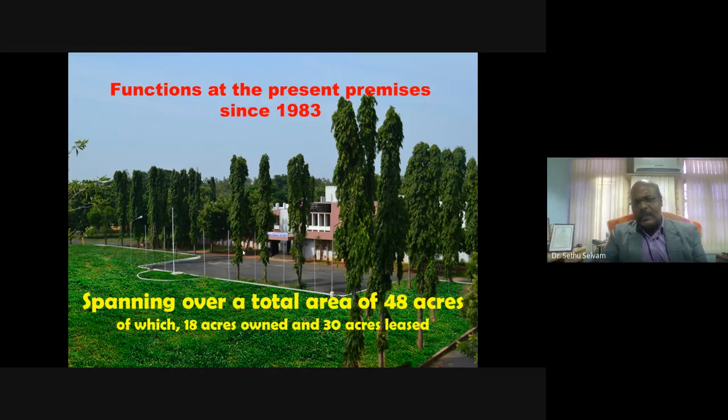Established in 1965—probably I was also not born at that time. These are the functions. We have 48 acres of campus, more bigger than any engineering college coming up nowadays. That is the vast basic infrastructure.

This is our main institute, where I am sitting on the first floor delivering the lecture. This is our main academic building, where most of the classes are conducted, with a well-defined infrastructure—LCD projectors, air-conditioned classrooms, and other state-of-the-art training tools. We also have a conference hall, air-conditioned auditorium of 140-seater capacity.

It's almost like a cinema theater, and we have renovated it recently. We have our own computer laboratory with internet and other features, and a very good library with more than 7,000 books. Our area of collection is mostly in thermal power plants—any old power plant machine diagram or line diagram, we have it. We also have faculty rooms, administration, and accounts.

Then this is the workshop. It's not only teaching—we take you to the workshop where maintenance and other concepts are shown, including a cutaway look of a pump.

So a person can see all these things. The workshop building also has a tutorial classroom for the purpose, and classes can be conducted there. We have certain basic facilities there also. This is just a gist of our workshop.

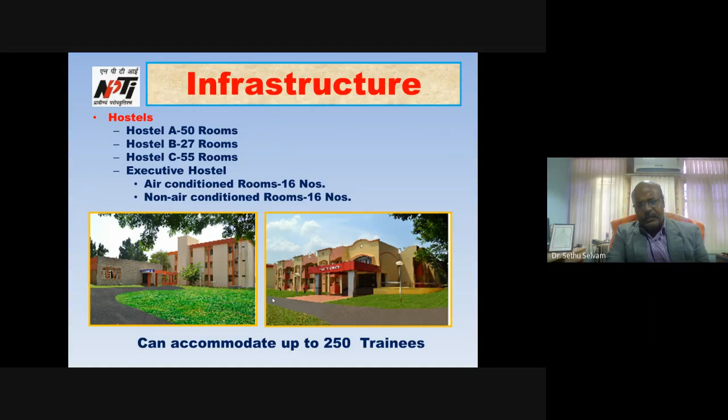We also have a hostel. We have 3 hostels, hostel A, B, C, and there is an executive hostel as a new facility. It can accommodate a maximum of 250 trainees. And this is our guest house, which has 4 air-conditioned suites.

Now, regarding the methodology of teaching, we have our own multimedia training package, because nowadays everybody wants computer teaching as supplementary. We have made our own packages, about 60 packages, and each package can run for more than 2 to 2.5 hours. So this way, the students are given this as supplementary material.

Because if I explain so many things regarding the generator, boiler diagrams, and inner details, it is not possible to bring out everything on a slide. So we have this, and we are also selling these packages commercially.

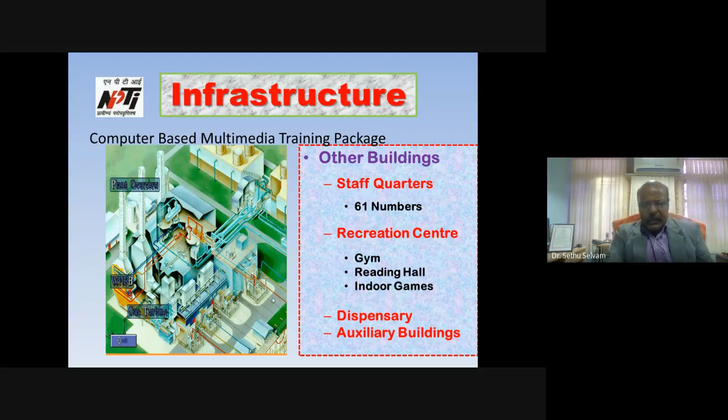Other buildings are there too. We have our own complex with 61 quarters. There is a gym, reading hall, all these things are there.

Coming to the academic point of view, we are running 3 regular courses: a 1 year postgraduate diploma in power plant engineering, then a graduate engineering course with a capacity of 77, and PDC, post diploma course, which you can do after a diploma.

Other short-term courses are also available. Now coming to the point of placement, I have produced a partial list. These are the power leaders as far as India is concerned.

TPCAL, TCE, GE India. Why I am mentioning this is because you want a career opportunity, so you should know the scope and who is in this teaching, in this pioneering experienced field, and what the scopes are.

Exactly these companies are there: Adani Power, Shapoorji Pallonji, OPG, ILFS, Bajaj Energy, Lanco, Torrent, Tata Power.

And the advantage is, once you join here, we have our own reputation, and because of that name, people come every year for campus placements. And there is a 3000 megawatt thermal power plant located in Neyveli, so they are our big brother.

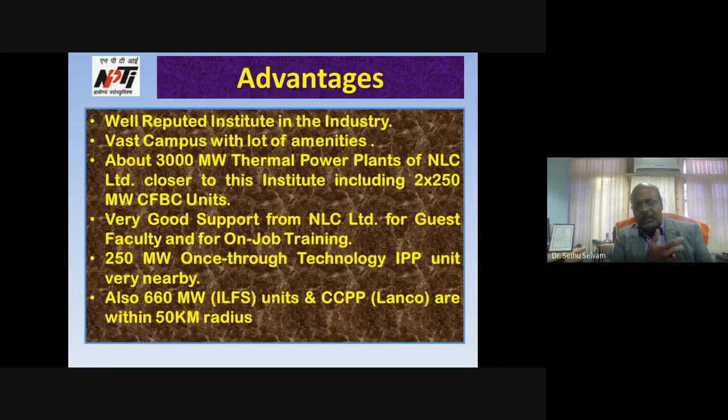We share their facilities for giving on-site training. And not only that, we take some expert faculty from them, because everything cannot be taught by us; everybody is not expert in everything.

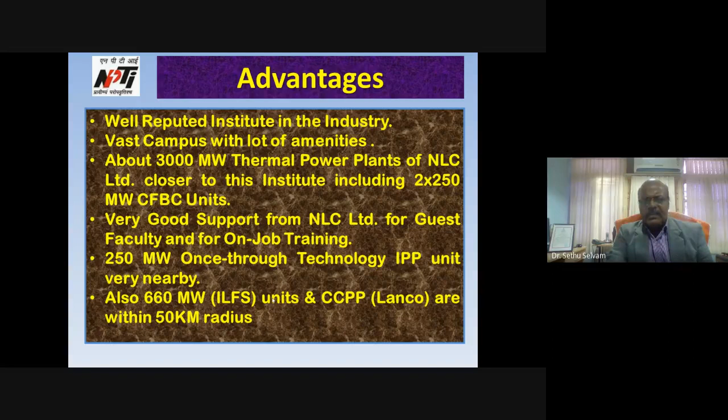So we also have an IPP, 250 megawatt once-through technology IPP nearby, also a 660 megawatt ILFS CCPP, and all are located nearby. Now, you may ask what is in that thermal power plant.

So let me show you this. Yes, this is on. I'll take you to this. Where is it? Coal to electricity - you should know this.

Can you see this slide? Can you see this? Yes, we can see it, sir. Coal to electricity. Yeah, this is what? Just a tool showing what the thermal power plant is.

Sir, the slide is not visible, sir. Oh sorry, this is not visible, I'll fix this. One minute, sir. Stop, sorry. And just... present now, a window, where is it?

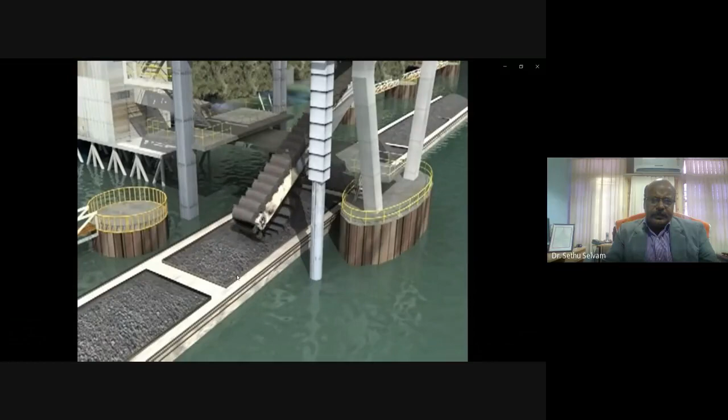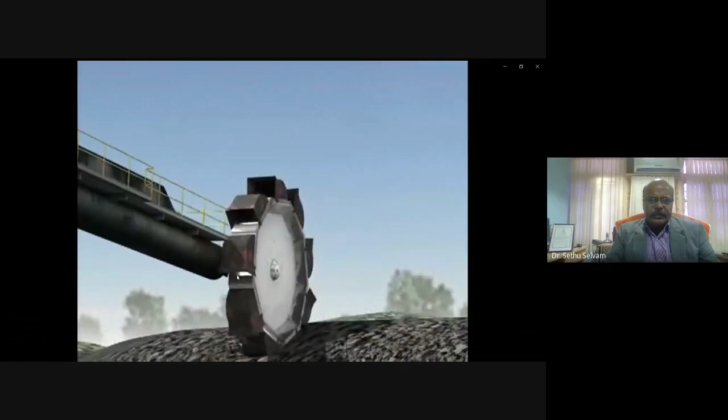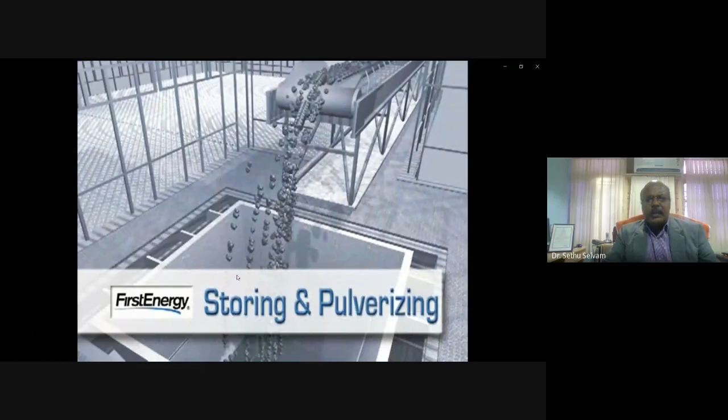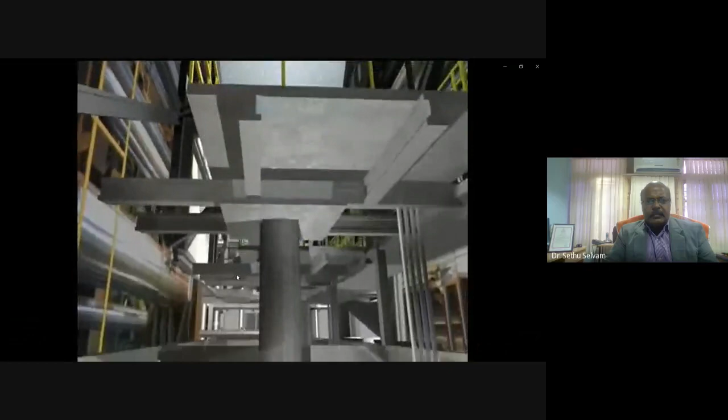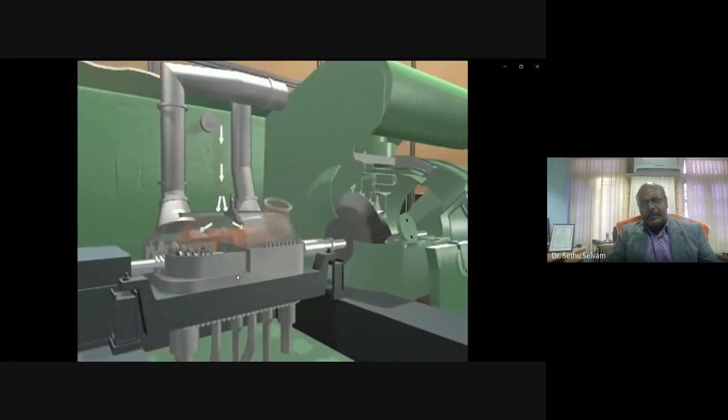This is the conversion of mechanical energy to electrical energy.

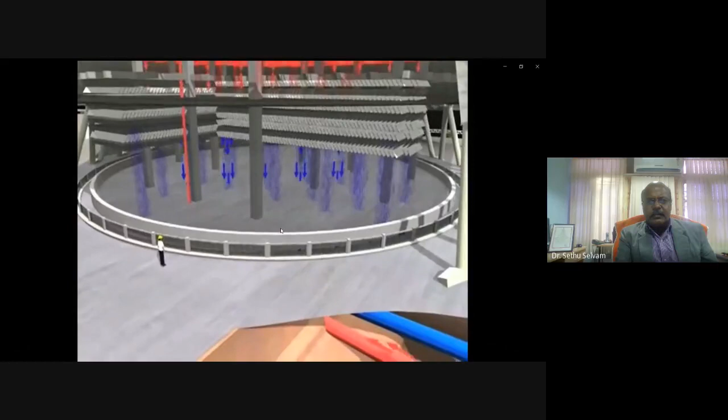Scrubbers, they remove fly ash.

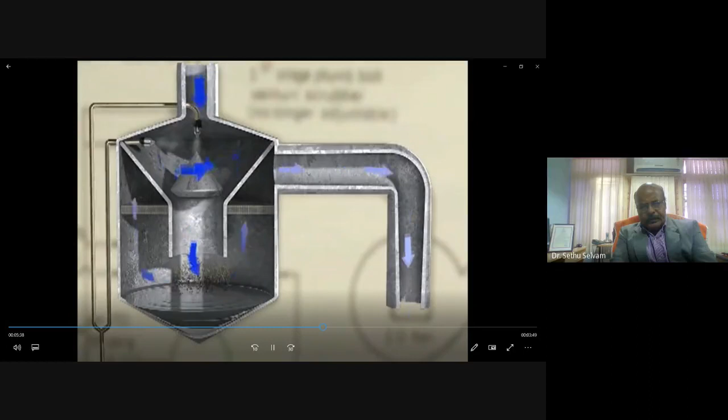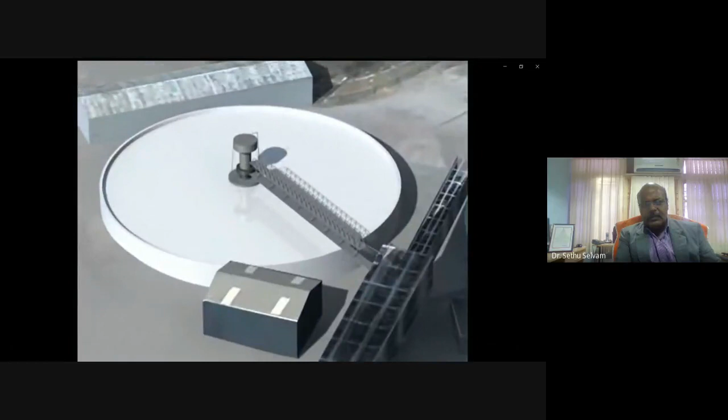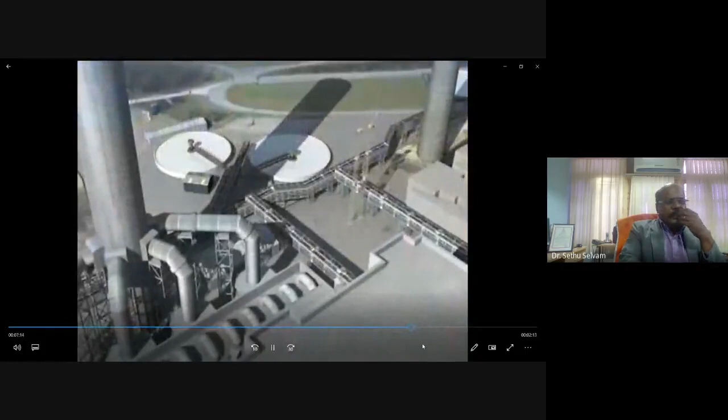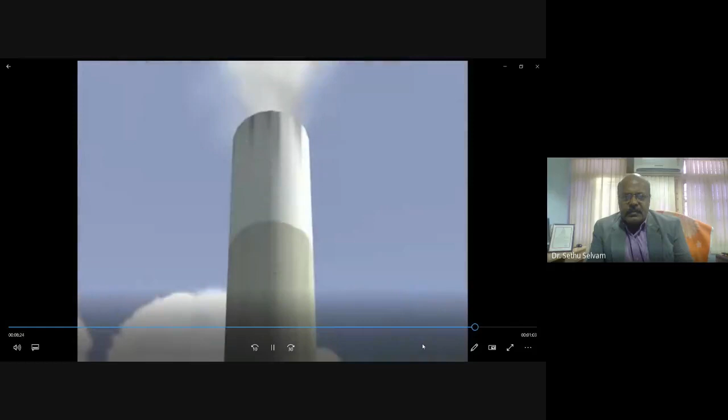This part probably... so up to this is the part. Now let me take you to the actual presentation. Is it okay? Is it shared? One second, one second, then I have to start here. This, you have seen the show now? Is it okay, Mr. Regan? Can you see this? No, sir, it's not visible to us. It's not visible to us, sir. Okay, one second, one second, I'm not conversant with Google Meet anyway.

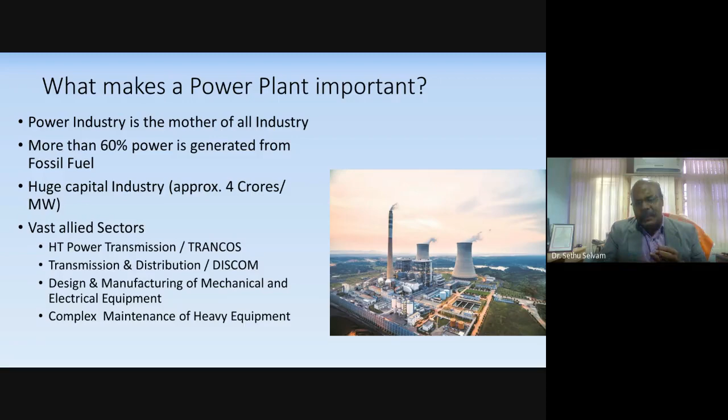Ultimately you are paid for the power plant from the user only. The user is using certain electricity, he has to pay, and other maintenance aspects are there. Everywhere there are scopes, from design, implementation, running, maintenance, and all. So the power plant has its pinnacle in all fields.

So what makes a power plant important? We are continuing. Huge growth opportunities to grow from a graduate engineering trainee to CMD, GM, President of Power Corporation. This is good, with very good remuneration. You all know the entry cadre salary of a GET in NLC is 7 lakhs. And if you become a GM, how many times is it multiplied? Maybe by about 5 to 7 times.

Not only that, you are working in a challenging industry, managing so much manpower, 1,000 people are working in that. So if you have a passion to work in a power plant, you can choose this career. Not only that, like the IT industry, here also we have a switchover opportunity - if you want to change to the next organization, well and good, you can change immediately because there is plenty of opportunity to switch over from one organization to another.

Great technical challenges in the job and opportunity to cross continents, because if you are working in a power plant, you're not only working with national traders and national manufacturers, you will be meeting international manufacturers, international bidding. So in this opportunity you travel to different countries, and different possibilities are there, with a wider technical platform to share your experience and attend technical conferences.

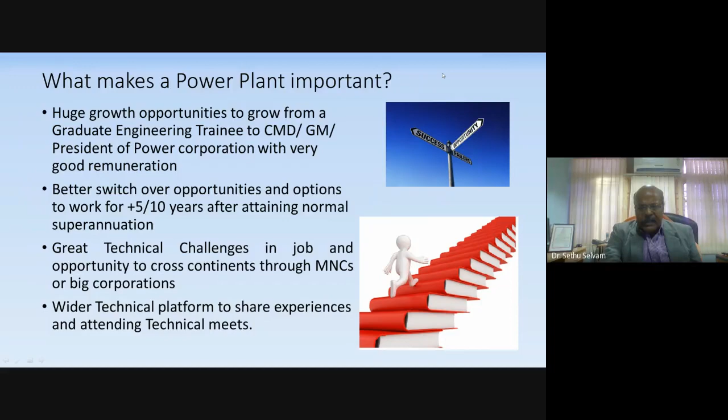A power engineer is a different person. He's not a specialist in electrical, motor, or something only. He knows everything - the mechanical concept also. Suppose it is a reverse cycle compressor, he knows that too. Not only that, he knows the maintenance of a mill and basic problems in the mill. So he becomes a composite engineer, having all the qualities of mechanical, electrical, electronics, instrumentation, and computer applications, because nowadays instruments come interfaced with Ethernet bus, Profibus, system bus - all these things make him a composite engineer.

He can be placed anywhere. Even if you switch over from power plant industry to steel industry or some other industry, you can work, because you are working on a process. Your safety norms or basic knowledge of instruments are there, so you can be employed anywhere. At last, he's a composite engineer with all these qualities.

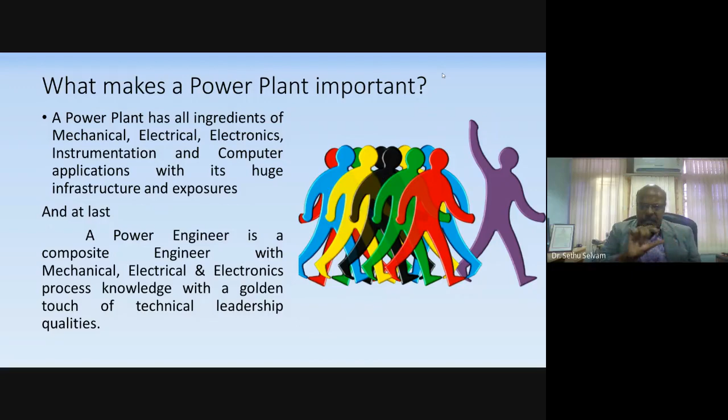Not only that, he is leading groups of engineers - hundreds, thousands of engineers. By that way he becomes a very experienced technical person. So he can give his services even after retirement. We have seen so many persons who retired at the top level still continuing up to 70 years of age, so your earning period is also increased.

So now, you have a mind to work here, and you know all the basics. Can I go immediately and get a job in a power plant? I am a graduate engineer with all good records - can I join? No, there is a restriction.

With a view to build adequate technical capacity and develop economically viable energy sector and energy efficiency, and comply with the laudable objectives of the Government of India, adequate scientific and technical manpower at all levels is a prerequisite. So you should have certain knowledge - who is going to give this knowledge?

There are certain institutes recognized by Central Electricity Authority. CEA is the authority interfacing with the power plants, and they have to certify institutes, like AICTE does. You may be good in knowledge, but you have to graduate from an AICTE recognized institute. Central Electricity Authority inspects institutes and classifies them on this basis. Being a pioneer in power plant training, we are also accredited with CEA, the Central Electricity Authority.

There is an amendment, the IEA amendment law, that says any person working in a power plant of capacity above 1000 megawatts must be trained for a minimum 52-week period from a CEA recognized institute. You should know just by looking at a pipe what it is - whether it is high pressure steam or low pressure steam - and what its essentiality is. Suppose there is a valve and you have a tendency to open it - if you open it, what will happen? Some accidents will happen. You should know all these things.

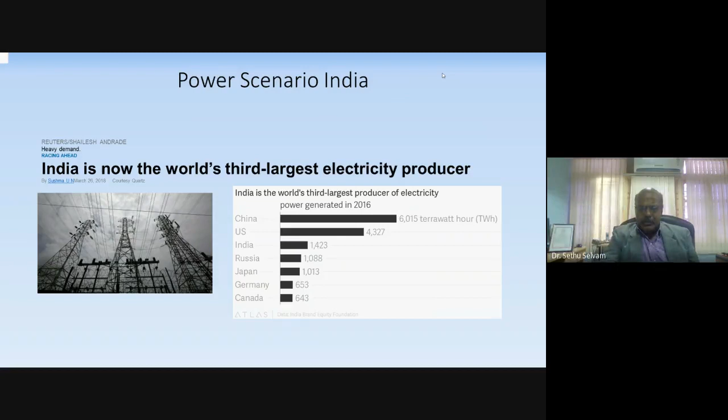You all already know it is power. This industry is the mother of all industries. India is the world's third largest producer and consumer of electricity - we produce this much electricity that we are behind only China and the US. But if you see other countries as a whole, our power generation is huge, very huge, and that makes it a business.

We are producing, and how does it relate to the business? Once upon a time, after independence, electricity was used only for light, and if you had a fan, you were a rich person - that was the ideology. Now the concept is changing - almost all middle income earning people have air conditioners, not just in one room, but in the common hall, the guest hall, all these things. So the demand for electricity is increasing.

If you are earning more, your electricity bill will also be more. So it is a measure of lavish use of equipment, lighting, and the economy as a whole. Nowadays we have so many mechanisms, and we are depending on machines.

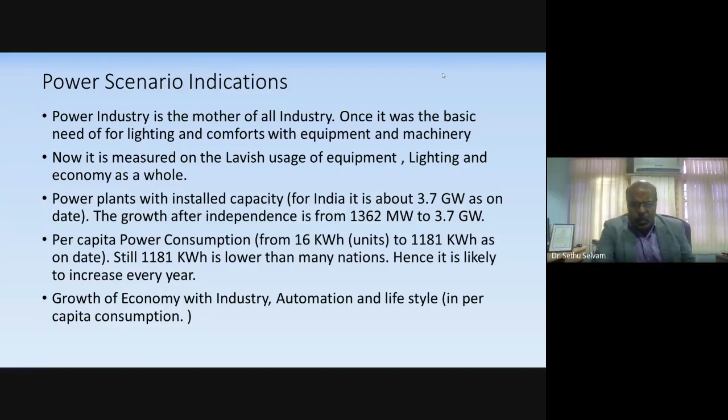I intend to show you the graph from the Central Electricity Authority site. This was shown as of 31st March 2019. You can see the huge jump.

From 1362 megawatt, to 3.56 as on 31st March 2019. Now it is more, the recent reports have not come, but it is anyway 3.7.

So every year there is a marginal increase, we can say 5 to 10% increase. A huge amount, this is a huge amount.

If you see, for example, just take these two, it is more than 10,000 megawatt. That means at least about 15 power stations had been commissioned in 19. So every year 15 to 20 new power stations come.

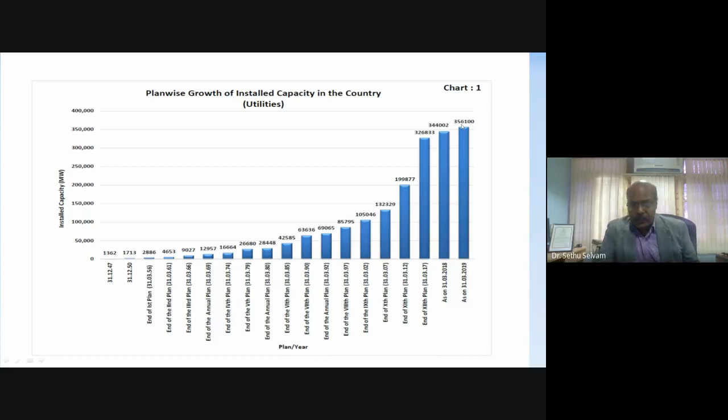And these require manpower from the very scratch level to the top level. So as a whole, we have a very huge demand of manpower. This is the per capita power consumption.

You can see it is increasing. From 2018 to 19, there was a marginal increment. There are so many reasons for this, because India started intensively using LED bulbs, low power consuming bulbs, as a result of which the marginal increment decreased. Now that point is saturated.

Again, we are likely to have at least 50 kilowatt hour further, 50 units further, as a result of which the demand is going to increase. How will you know the demand is increasing? Because the state electricity corporation is not able to give the power to the people.

So in earlier days, load shedding was regular. Nowadays it is managed well, and we are at least able to meet the requirement. When I was a child, every week there used to be one day blackout.

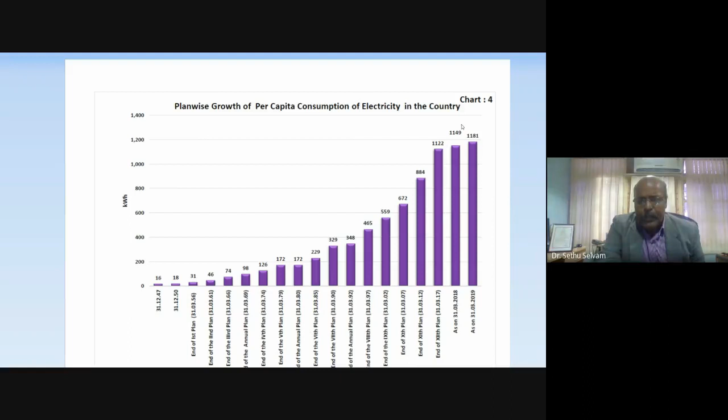This was what happened those days, that was the 90s and 80s. So now this is improving thanks to other features also.

If you see, our power requirement has to increase at least 10 times, that's the idea. So it has to increase at least 10 times, but at least it will be 5 times.

Now, plan-wise growth of installed capacity. Every 5 years India plans, and you can see there was a huge jump in 2012 to 17, where private participants used to come. Earlier, the business was only government, meaning state government, central government, and other corporations. Now private participants have come as a result.

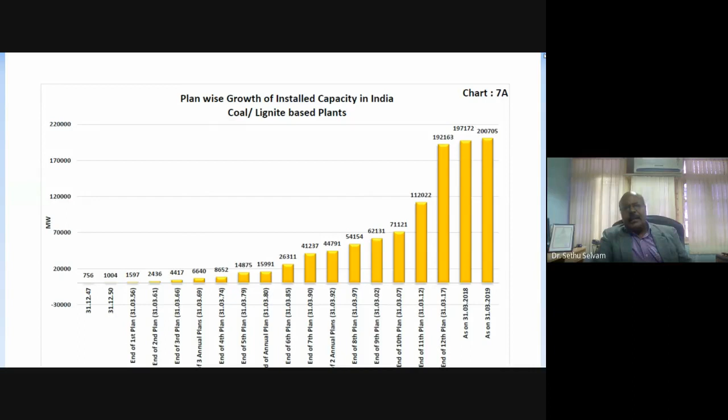Instantaneously, so many power plants are coming, adding to the total generation. So this is a very good business, but the problem in '18-'19, due to solar and renewable energy and other things, we have struck up somewhere else.

Now this concept you should see - you may ask, green power is available, what is the necessity of this? Different types of power sources are renewable and non-renewable. Renewable is that which either never runs out, like wind and solar energy. You are from Tuticorin, you have seen windmills, so many windmills, and in Kayathar there is one solar power plant also. These are green energy. The advantage is that their emission is less - no carbon dioxide, no sulfur dioxide, no other nitrogen oxide.

But can you depend on them totally? It's all seasonal - during the peak monsoon, peaking of wind power is there. Similarly, solar is having certain variation, during daytime from probably 9 a.m. to 3 p.m. there is there. So even then we are mixing it, and the issue is everywhere you cannot have wind power. Similarly, solar power requires huge land - you cannot put it in an agricultural basin, as it will again deplete the business of agriculture.

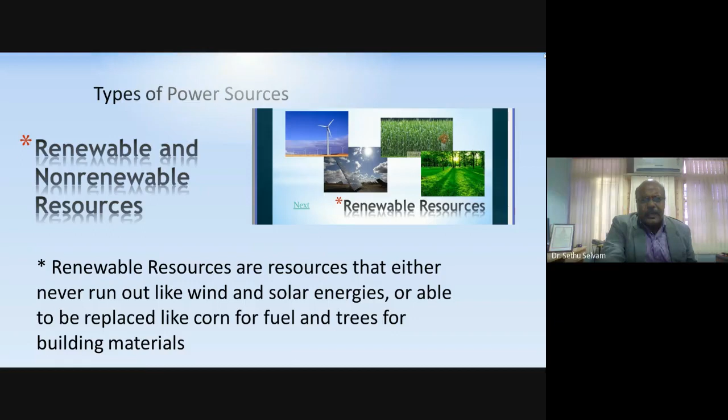Renewable sources, others are also there - animals, water, and earth heat. All these are renewable. Wind, heat - but they must be harnessed and transformed to a useful form like current. Resources such as plants and animals can be replaced by offspring. For example, if deforestation is done, you have to wait for another 20 years until new saplings are planted and a forest is made. So the time duration you have to see.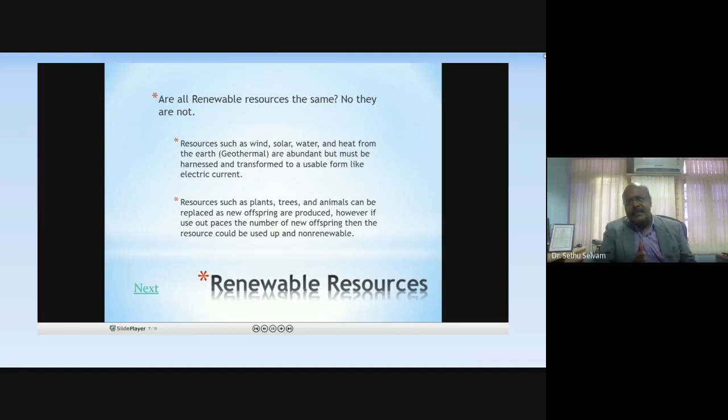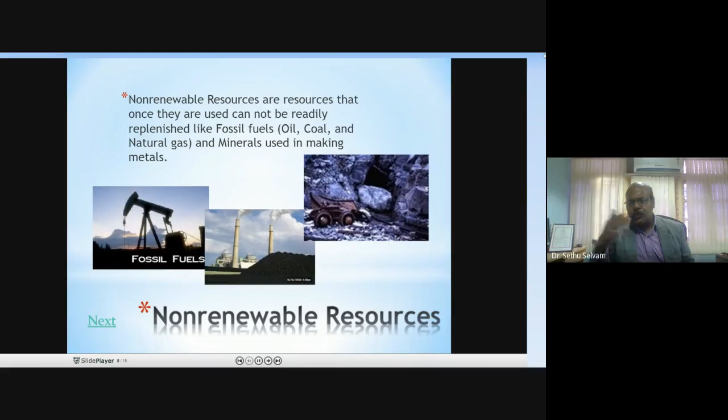Similarly, coal - you call it a non-renewable source, but where does coal come from? It comes from dead trees and animals and other things, all sedimented in rock, and due to thermal process of compression and heat, they are made into coal. This also has a certain - because it might have been done some 2000 years ago, and we are using it again. It can be created, but you have to wait 2000 years. That period of replenishing is more.

Are non-renewable resources gone forever when used up? No, it will take millions of years for things like oil, coal, natural gas to be made by natural processes. If they are used up by one generation of humans, it will be 1000 generations before they are available again - maybe after 3, 4 generations, people won't know what coal is. So we have to reserve certain things, and we have plenty of other renewable energy also that is to be used.

And there is a finite number of times these resources can be recycled. The similarity is that both are natural, both can be used as fuel, and both can be used up forever if not managed correctly. For this reason the government has made it so we have to mix a certain proportion of fossil fuel coal, and we will not go for mining.

If coal is cheaper, you can get it from Australia, Taiwan, Cambodia, all these countries. And in Tuticorin you are getting it from port and using it. But don't deplete your own resources for no reason, because the emission is also a problem - you emit carbon dioxide, you emit nitrogen oxide, and other gases.

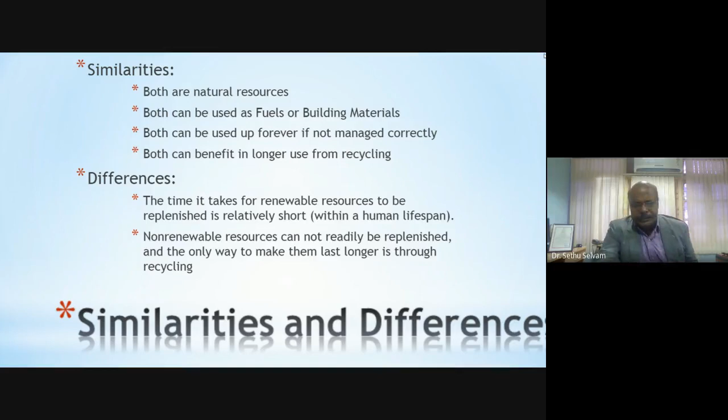Now, let's look again at renewable energy resources. Renewable energy sources have been shooting up, and thankfully Tamil Nadu is the leader - Tamil Nadu is the leader as far as wind energy is concerned.

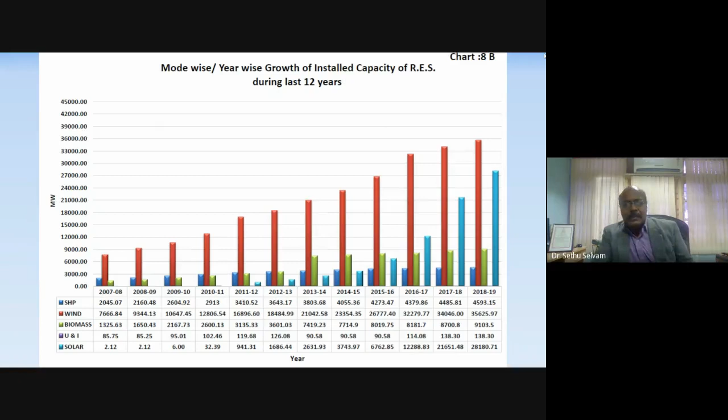We are generating more than 5,000 megawatts during peak hours, and we have solar contribution also. Tamil Nadu, and not only Tamil Nadu, all other parts are now coming up. Wherever barren lands are available, in Rajasthan and other places, solar energy is also used. You can see the shoot up of solar from 2007-8, when the Ministry of MNRE for renewable energy sources started. From that time, it has gone up at least 5 times more, which is very important because that is green energy.

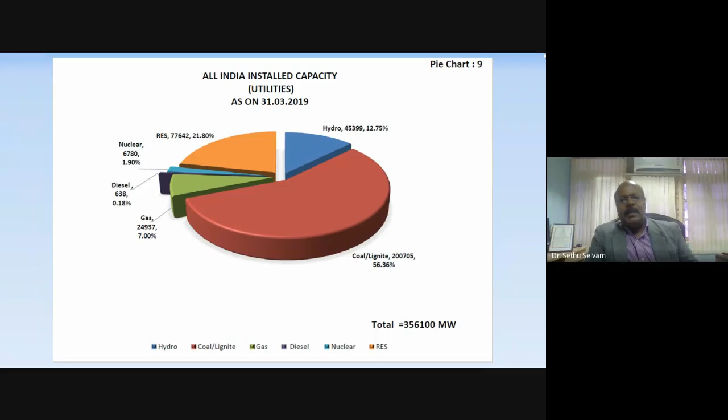So hope things are going fine. Mr. Regan, is there any problem?

It's okay. So the utility electric sector in India has one national grid, because we are one nation, one grid, and this was having 350.162 gigawatts as on 28th February 2019. This record comes later. Renewable power plants constituted 21.8% of this figure, as you have seen in the pie chart.

And the gross electricity generated by utilities was 1,303.49 terawatt hours. The total electricity generated in our country was 1,486.5 terawatt hours. The gross per capita electricity consumption was 1181, and it had a jump of about 31 kilowatt hours in one year.

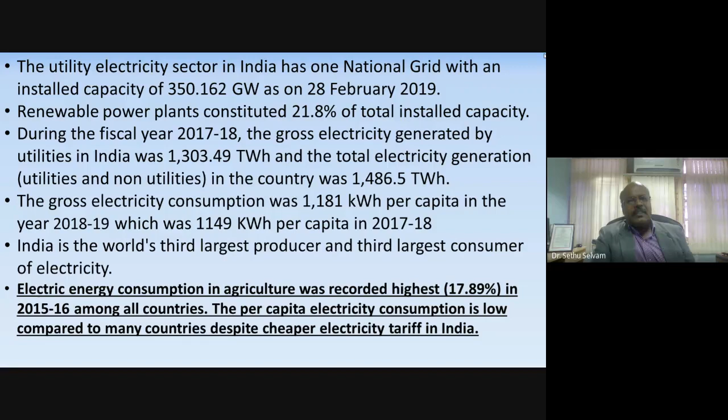It's very less, multiplied by 130. So we are the third largest producer and the third largest producer and consumer of electricity. As far as the agricultural sector is concerned, India is the country using maximum electricity in agriculture, so we have to be proud at least.

Okay, now coming to the point, we have 350 gigawatts. Is it sufficient? Why do we have to go further? These are the questions. We have surplus power generation, but still it is seen that some parts of the country are not having proper electricity, because we are not managing it, and the mechanism is not good — not only the mechanism of transfer, but also the money realization.

Because whoever is the agency, they can give power as long as the money for the electricity is realized. It's not okay otherwise. So for that, the government is working on certain platforms, and this scheme will ensure continuous and uninterrupted supply, because it's a business. I can generate the power, but I have to get a certain return, so that I am able to pay my bankers, employees, and a certain percentage as interest on my investment.

So this scheme will ensure continuous and uninterrupted electricity supply to households, industries, and commercial units, by creating and improving necessary infrastructure. Necessary infrastructure means we have to start from the plant itself — whether the plant is running efficiently, what coal it is consuming. If a plant is consuming a lot of coal and producing very little electricity, you check the plant once again and ask them to modernize. If not possible, close the plant.

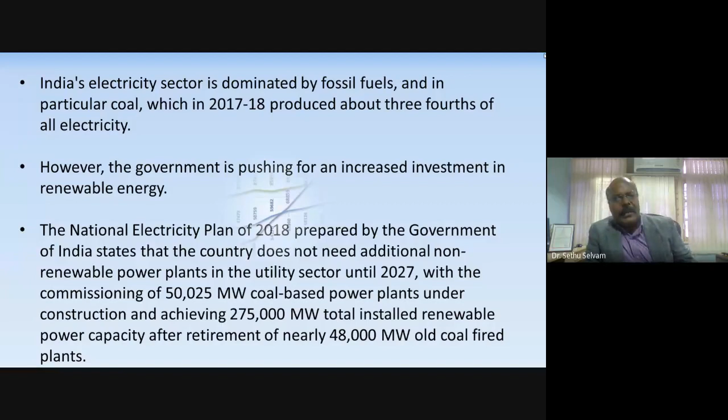Even in Neyveli, there was one old thermal power station that is now retired. The old technology cannot handle much mechanism, and the efficiencies are lower. So this is the sector-wise growth of installed capacity.

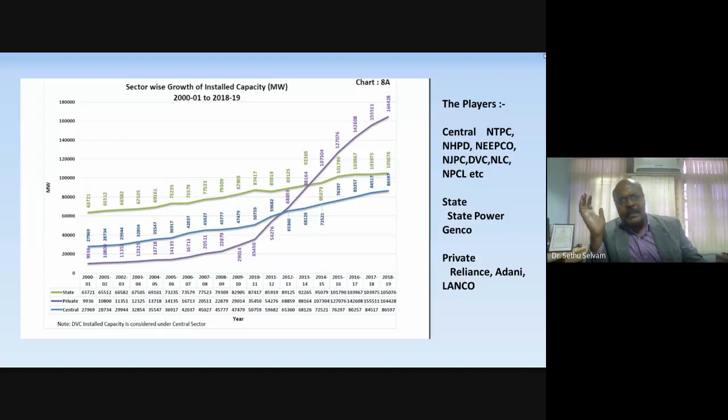Now the idea has changed, the concept is changed. Government is not investing huge amounts of money in this. They have given certain relaxation to the private sector. So overall, from 2010 to 2018-19, private sector has boomed, and their installed capacity is more than state-owned and central-owned. But if you combine state and central, government sector is still in the upper hand.

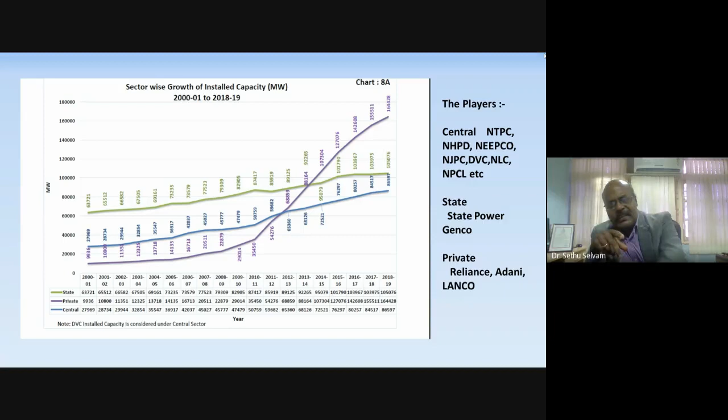Now we have to see the cost, which makes it very important to understand why you're joining the power plant sector. There are different types of sources: onshore, meaning on the seashore itself, and offshore, meaning in the sea itself, where there will be wind. Such sources have varying capital costs, and wind power has lesser capital cost.

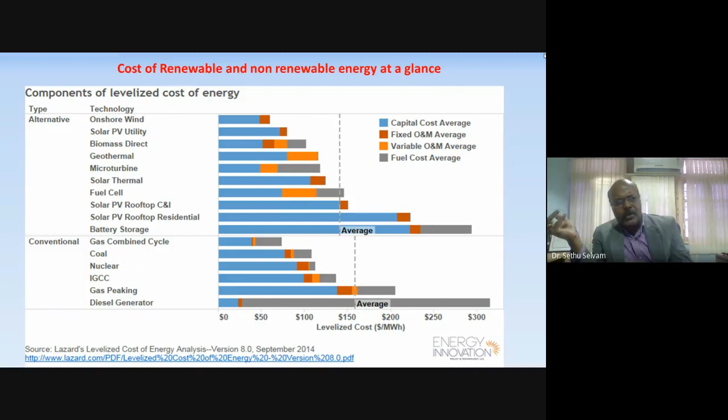Solar PV utility has two parts: one is solar PV with battery backup, and the other is solar without backup, which is online—whatever electricity is produced, you can't store it, you give it to the grid directly. This may be cheaper, with lower operation cost. Then there's biomass, geothermal, micro turbine, solar thermal, and fuel cell.

Here you see the conventional types. Gas combined cycle has lesser cost, but the problem is we don't have enough gas to supply for power plants here. Next is coal, which is the next cheaper electricity option. Then nuclear—the problem there is availability of fuel and the plant itself takes so many years to construct. There's also integrated gasification of coal and combined cycle coal, but this takes more power.

Diesel generator—obviously the cost is high now, with diesel priced at 80 rupees per liter, so we cannot operate it economically. There was a time when diesel generators were cheaper, but now people are moving to static generators like UPS systems.

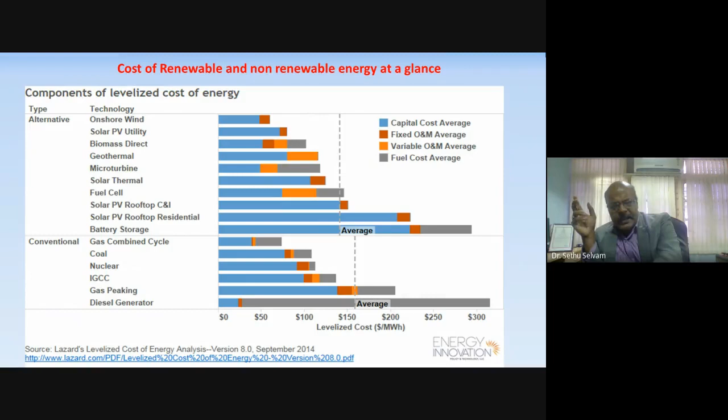So this gives a complete comparison of the cost of renewable power. You can see coal is less than—this is per megawatt, sorry, per megawatt hour—it is less than 80 to 90 dollars. You can compare it that way: 90 multiplied by 100, so it's around 8 to 9 rupees, though it will vary for different plants.

Now the question comes, why should you join this sector? How much manpower is employed in a power plant? You can see different plants shown here—overall combining thermal, hydro, and nuclear power systems, all of this becomes the power sector, not just individual coal power.

Even for coal power, one man per megawatt is required for thermal power. Hydro power requires 1.5, which is more. Nuclear power requires around 2 per megawatt. So for 2000 megawatt in Kudankulam, approximately 4000 people will be there. Actually it's 3.8 for nuclear, so 3.8 into 2000 gives about 7000 people. Overall it's 5 times, including contract labor and other allied sectors, because everybody is not directly on the rolls of the power plant—you have to employ contract laborers too.

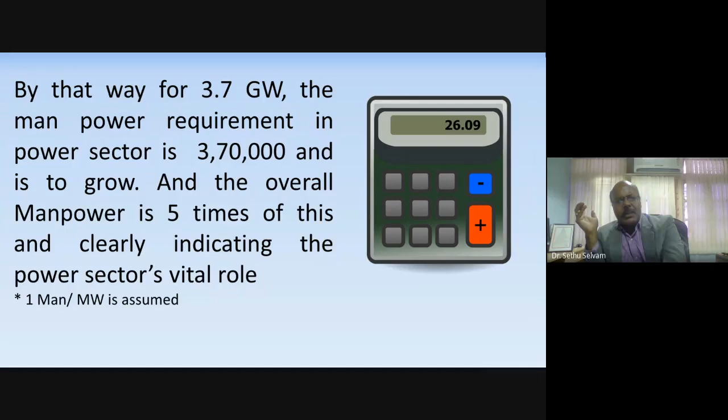So now you know how much power is installed—3.7 gigawatt—meaning 3,70,000 manpower is the requirement directly. Overall manpower is 5 times that, so multiply by 5, giving 18,50,000 manpower employed in power, directly or indirectly. This is a huge sector with huge scope. Even in Tamil Nadu, installed capacity is around 8,000 megawatt, so per megawatt, we have more than 40-50,000 people employed in the power sector.

It will be more—I'm not saying this myself, it's shown from Powerline magazine. It says we don't have a skilled workforce in various sectors, especially power. Compared to other countries, only 2.3% of our workforce has undergone formal skill training, versus 68% in UK, 75% in Germany, and 52% in US. This shows there is a skill gap, which can be addressed only through training institutes.

The advantage India has is that 54% of the population is below 25 years. That means in future, after some 25 years, we'll have huge manpower who will be working and willing to learn. So they have to be trained in proper training institutes.

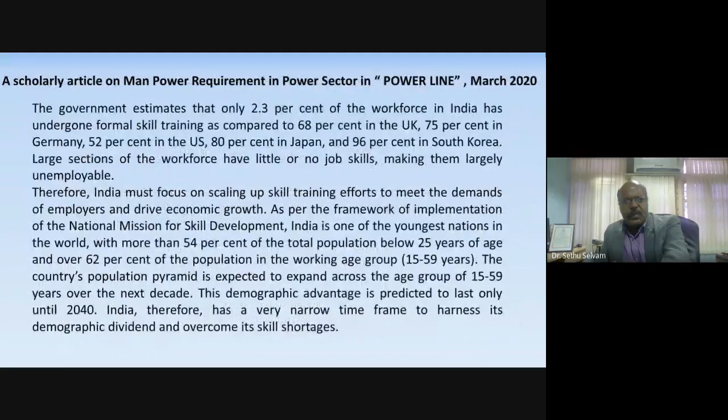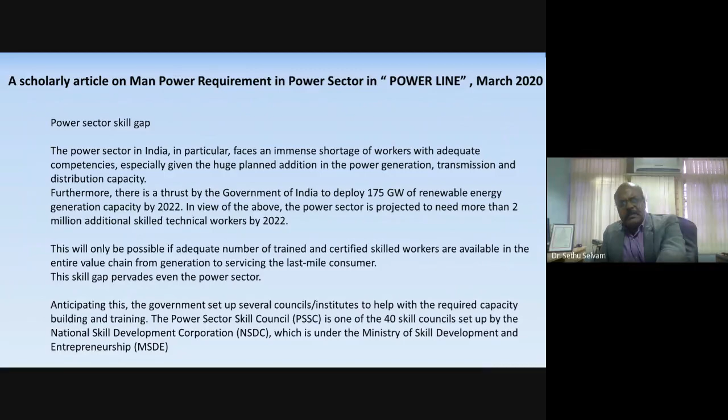For that purpose, there is a skill gap, and this skill gap can be met only by training. So the government is also encouraging this, and they have mentioned NPTI. We have institutes in Faridabad, New Delhi, Durgapur, Nagpur, Neyveli, Bangalore, Nangal, Guwahati, Kerala, Shivpuri, and other places. We run these courses.

Now coming to this, we are almost approaching the end. PLF is one of the things that shows the plant loading factor. Suppose you have a bike with a maximum speed of 150. Can you travel at 150 most of the time? No. Then take another scooter with better mileage, whose average speed is not more than 60 kilometers per hour—that is better. So plant loading factor is how much you can load your plant for the requirement. This gives the demand of electricity.

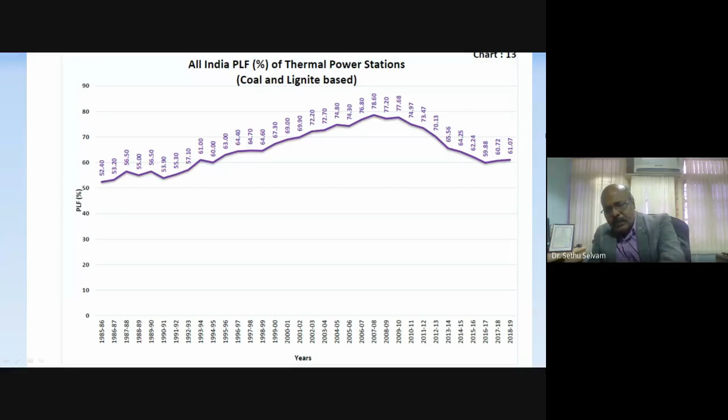In the 2008 to 2010 period, there was huge stress, and plants were running with 77% availability. Now it has reduced to 61%, showing that total demand has reduced to some extent. This is why it is not shooting up more than 20-30%, but the curve is always steady. Earlier it was decreasing, but now, in recent years, there is a steady growth and it is increasing. So it is very important that we are moving towards a positive trend.

Power is utilized not only by domestic consumers but also commercial, industrial, agricultural, and traction services. Obviously domestic demand will increase since new houses are constantly being constructed. Similarly, there is improvement in traction, and commercial and industrial infrastructure is growing. As a result, power consumption is only going to increase, with no chance of coming down. Power will always increase—that is the idea.

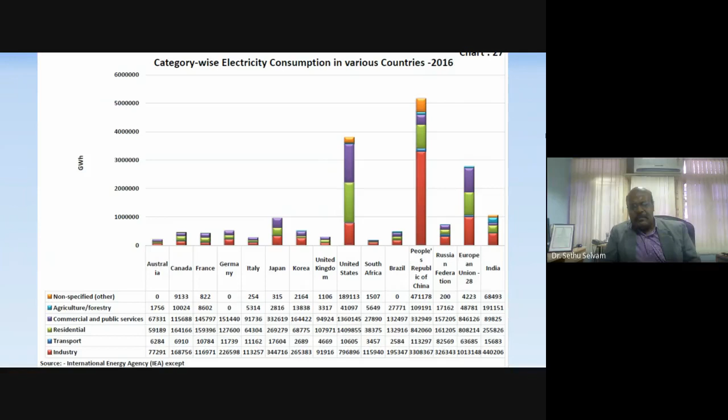Now, category-wise energy consumption: as I told earlier, agricultural is also significant, domestic is lesser, and the other three major categories are industry-related. If you see China, a lot of power is used in industry—that's why their products are very cheap.

Now let's look at the challenges. Where do the challenges come from? There is competition for power now from renewable energy. As a result, since it involves huge construction, operation and maintenance, the cost per megawatt of nuclear, hydro, and thermal power plants is high.

Now, the commissioning period of nuclear, hydro, and thermal plants is long. You've seen examples like Tuticorin—when I visited the Kudankulam project some 15-20 years back, it has only come online now. So it takes about 20 years for nuclear. For hydro, it will take 30 years. And thermal will take 3 to 4 years.

If you see the service life of a power plant—for example, I joined as a graduate engineer, and until my retirement I can work in the same power plant, because the life of a thermal power plant is 25 to 35 years. What about hydro? The Mettur Dam has completed more than 70-80 years. But what about nuclear power plants? Will they run continuously? You have to replenish them, and if any accident happens, the business is over.

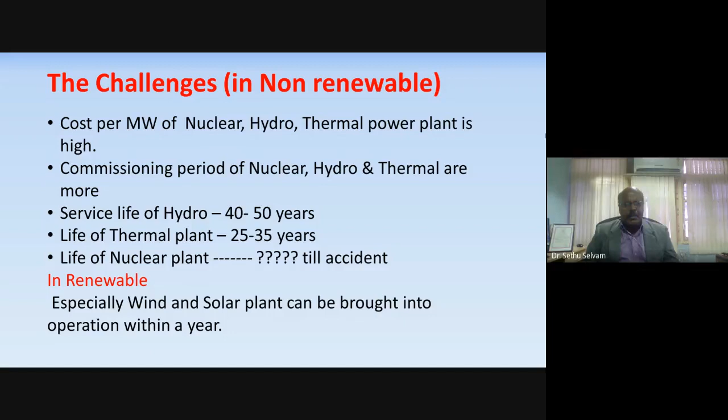In renewable energy, wind and solar can be brought into operation within a year—you just have to install the equipment. These are the things that make the renewable sector brighter than conventional power plants: shorter installation period, quicker yield period, and if you take a loan, your repayment period starts almost immediately.

Now, common challenges: the power is produced and sent, then it has to be received by a consumer who pays the bill. In between, there are problems—transmission line capacity addition. If I start a power plant but there is no transmission line, it's a problem. The government has to work on transmission capacities and T&D losses. Transmission and distribution loss, technical and commercial losses, will always be there due to heating, mismatching, transformer core loss and other factors. There will be some loss, but it should not be too high. Suppose you are losing 20% of energy during transmission—who has to pay for that 20%? The poor customer has to pay.

If you make your system effective, that 20% will add to your installed capacity. This is why the government has taken strict measures to minimize T&D loss. There is competitive bidding, and there is no monopoly in this market. You want to sell electricity, you can sell it depending on your price.

And lowering of peak load. Peak loads are lowered, and I'll show you a graph that peak load means more generation. PLF was decreased, as you have already seen. Low electricity bill charges, you cannot raise them.

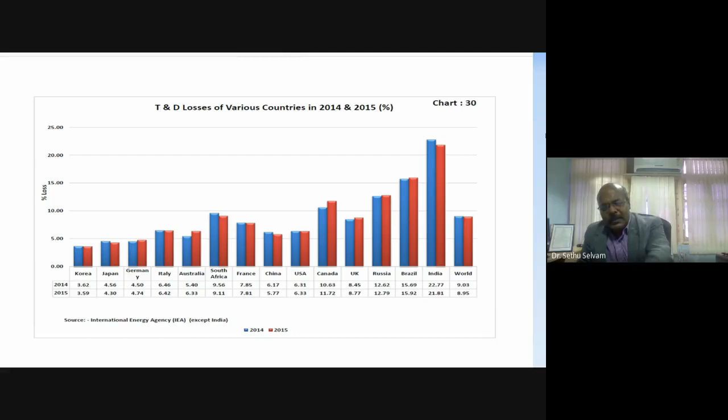Now to understand the all-India peak and energy deficit: peak energy is the maximum energy in a day of 24 hours. What is the peak requirement? It's not going to be the same throughout, because in the morning people are getting up and doing many activities, so it will be more. Once you go to office or school, there is a common steady movement.

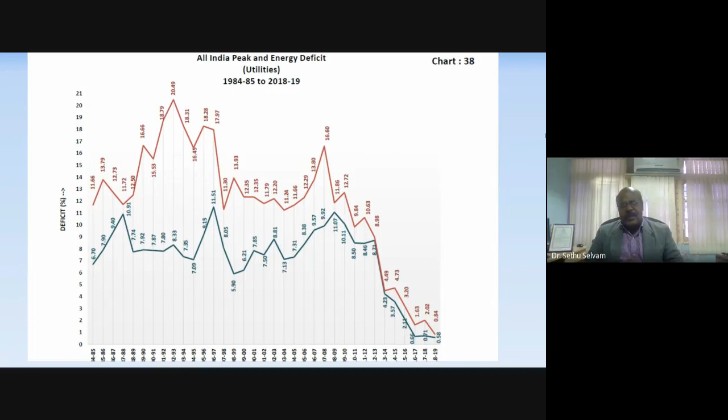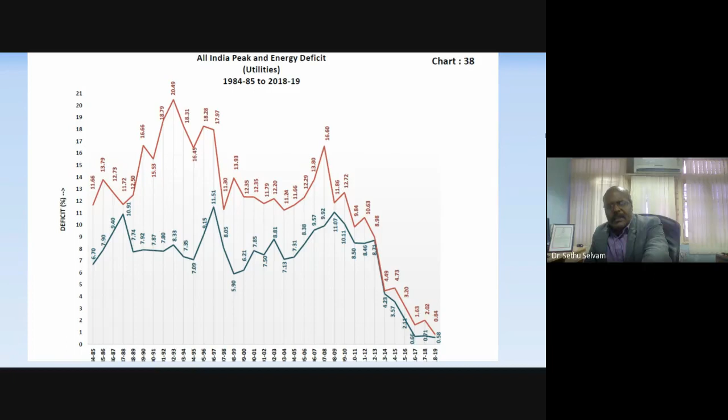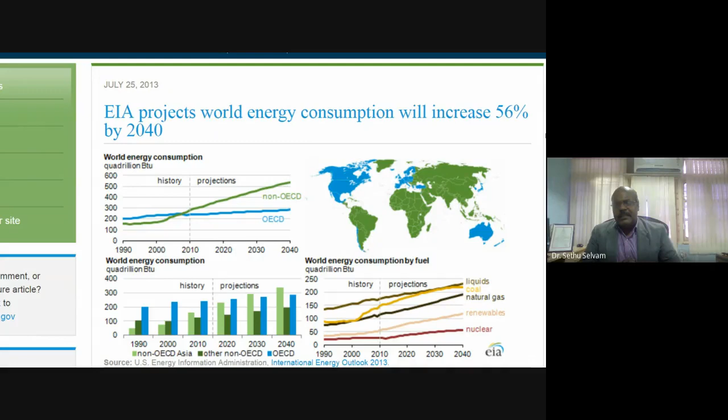Going with the EIA, Energy Information Administration, they have a prediction for the whole energy demand for the next 20 years, how the scenario is going to be. They have predicted that nuclear will grow constantly, renewables will pick up momentum, natural gas will grow further, but coal will see a saturation, though it will still dominate. So these are the gist of that.

So renewable energy and nuclear are growing, each increasing by 2.5%. However, fossil fuel will continue to supply 80% of energy to the world. Natural gas is also growing fast. The industrial sector continues to account for the largest share because population is almost saturating. Now the dominance is from industry. But carbon dioxide emissions, because of strict norms, mean we have to switch over to renewable energy.

Okay, so this is the idea. You can refer to any source for more.